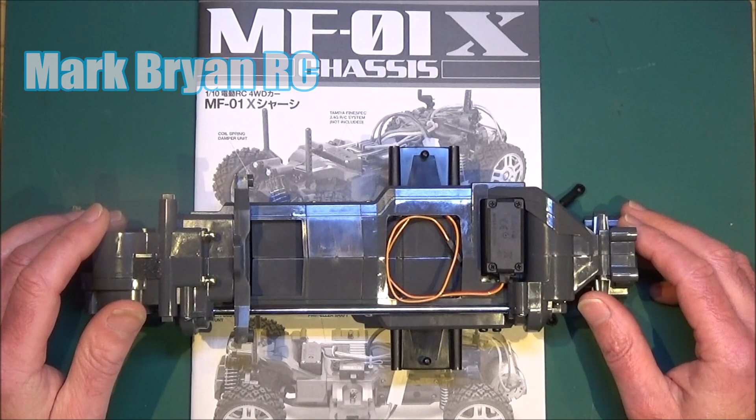Hi there, Mark here again, welcome to this video, part 2 of my build guide for the MF-01X chassis. It will eventually be a Ford Escort Mk2, but so far we've got this far with the chassis. Most of it is together - we've got the prop shaft down the side, the servo installed, and the steering linkages. Let's get on with step 19, and hopefully by the end of this video we'll get this chassis up on its wheels.

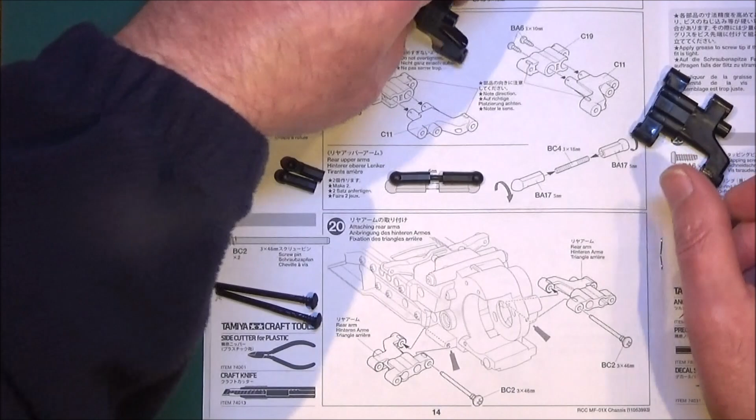Parts 19 and 20 are making up the rear arms and attaching them to the chassis, and it's time to open up parts bag C to do these steps. I've already made up one arm - it's really simple. Get parts C19 and C11 and make sure you get them the right way around like this, then simply pop them together with a 10mm screw in each of these two holes. As the instructions say, don't go crazy over tightening these, because this is very soft plastic and it'll be easy to strip the plastic out of those holes.

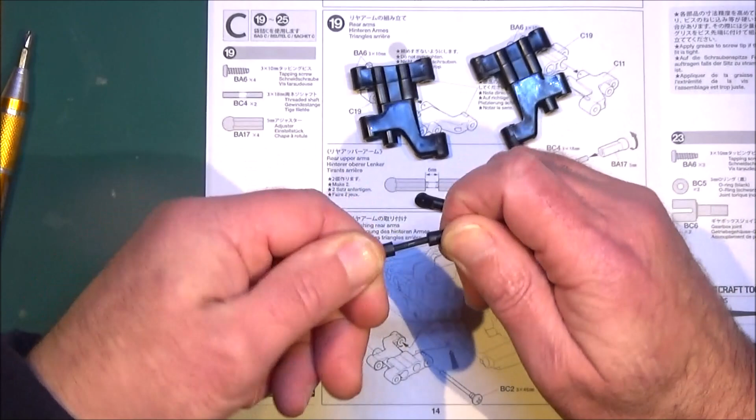With those done, you just need to make up two of these, which are the rear upper arms. You need this little threaded bar, and you need to thread on a BA17 ball adjuster, and screw that in all the way. Well, I say all the way - it is quite tight, and you need to just follow the diagram there and make sure that the gap is 6mm between those two ball ends.

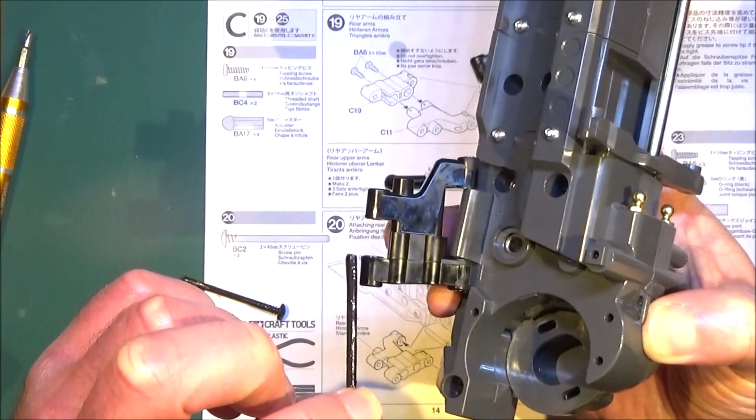Step 20 is simply a case of attaching those. Make sure you get the alignment right, so the arms need to look like this, and make sure you're attaching to the end where the motor's going to mount - that's going to go on there, and simply fix into place with BC2, which is a 3x46 screw pin. Notice I've put a little bit of grease onto this screw pin because these do tend to rust. Simply fix one on each side.

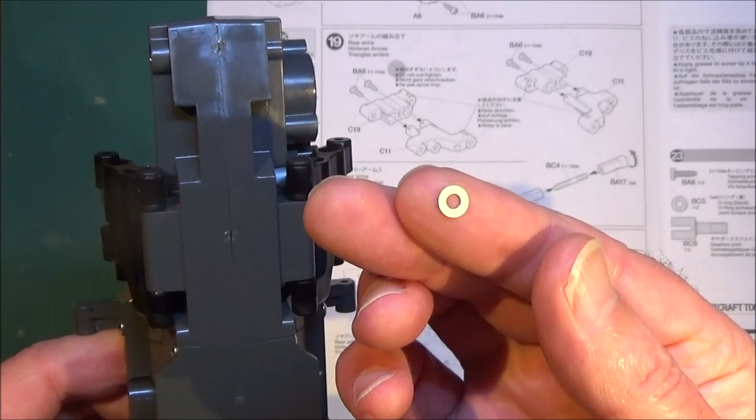Just a little tip here - as you can see, this is fitted with just the screw pin, and if you look closely you can see that movement there. It moves up and down quite a lot, and I'm not too happy about that. So all I've done is got a 3mm washer like this, and fitted it in between the chassis and the end of the wishbone, or the A-arm. Now I don't know if you can see that, but I'm trying to move it and there's hardly any movement at all. So yeah, a simple washer solves that problem.

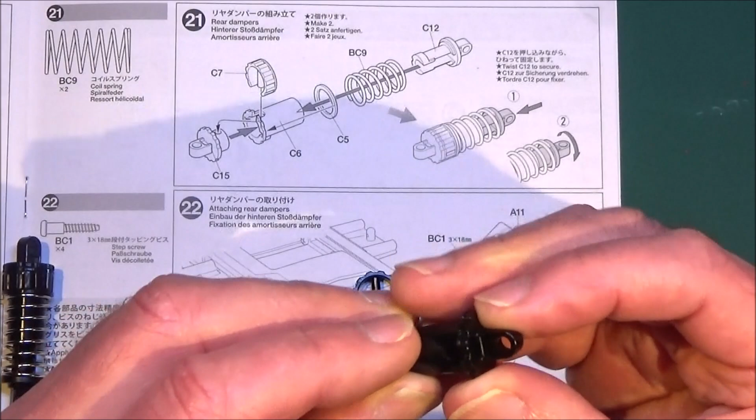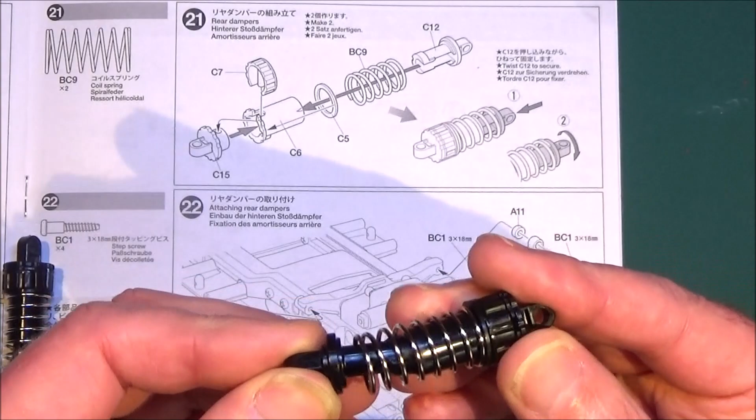Step 21 is making up the rear dampers, or pogo sticks as I call them, because there is no damping in these whatsoever. But anyway, if you're going to use these, it's really simple. Basically get your body, slip the cap in, then you've got this kind of spring clip thing, goes like that. Then you've got your C5 spacer, put your spring on, then simply get your other end here and push it inside and give it a half turn, and that's your really amazing quality shock absorber stroke damper.

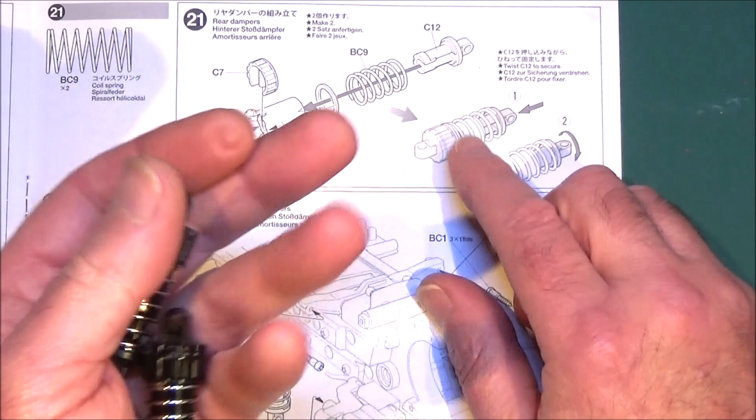They're all the same, so you might as well make up the four while you're at it if you're going to use them. But I won't be using those because I've got these budget alloy oil-filled shocks from JKRC. You can see the number there - about 12 quid, so cheap as chips for a set of 4.

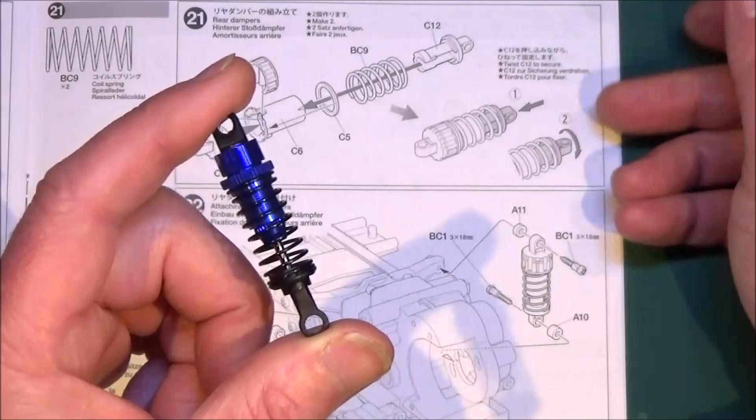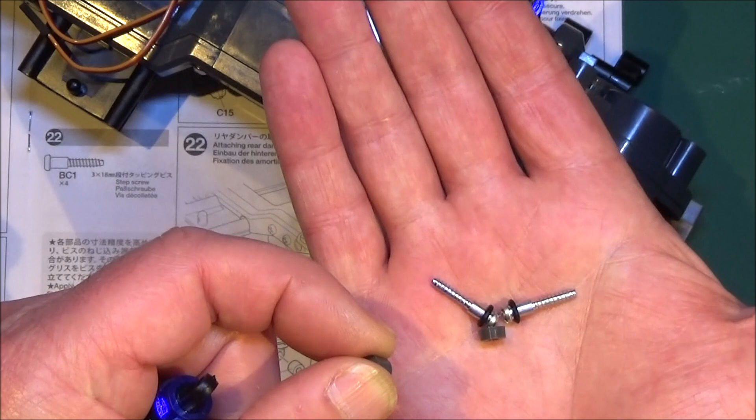So I'm going to be putting those on in the next step, which is 22. To fit each shock, all you need is BC1, which is the 18mm step screw, and you need these plastic parts A10 and A11. You can see them there, and the A11 goes at the top and the wider A10 goes at the bottom. These shocks do come with O-rings just to space out the top and bottom mount, because they are rather narrow on these. So that's why you're seeing those.

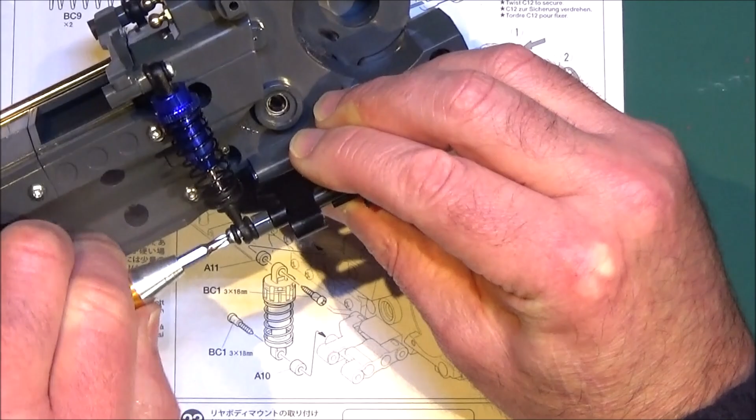Okay, so they're both fitted now, and yeah, they seem to work quite nicely. Nice bit of damping there.

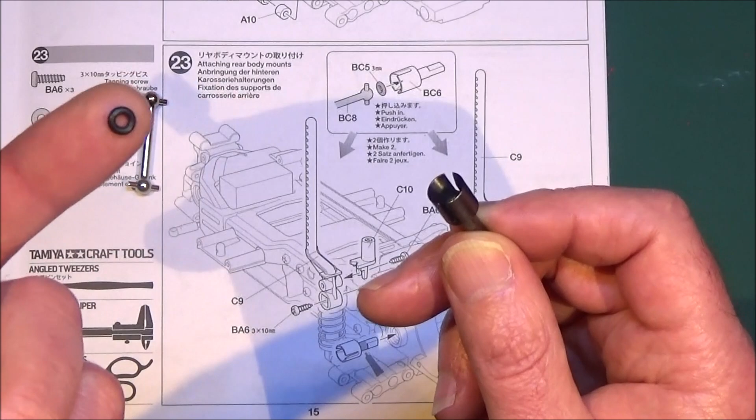On step 23, you want to get your gearbox joints, or I call them the output cups, and you want your little BC5 O-ring, which you just pop in the end. Like it shows, get a drive shaft or dog bone, give that a good push in, and put a bit of grease on these, and simply slot them into the rear diff there.

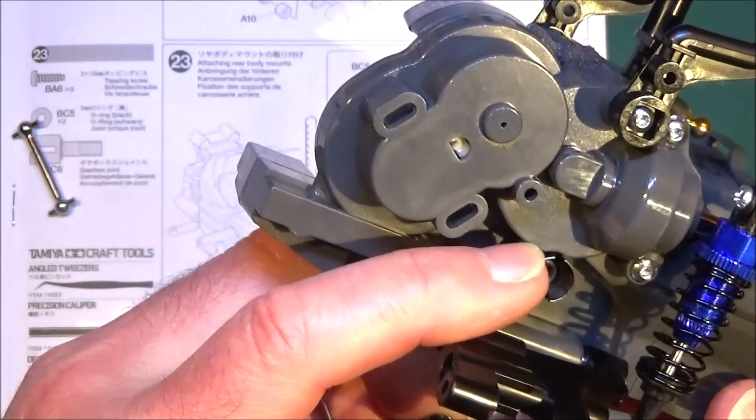You might have to turn it round a couple of times to get it located, push it right in to get both of those in. As shown here, you've got part C9, these long body posts, just one screw as you can see where they're attached, one on each side, and the aerial holder if you need that, which is part C10.

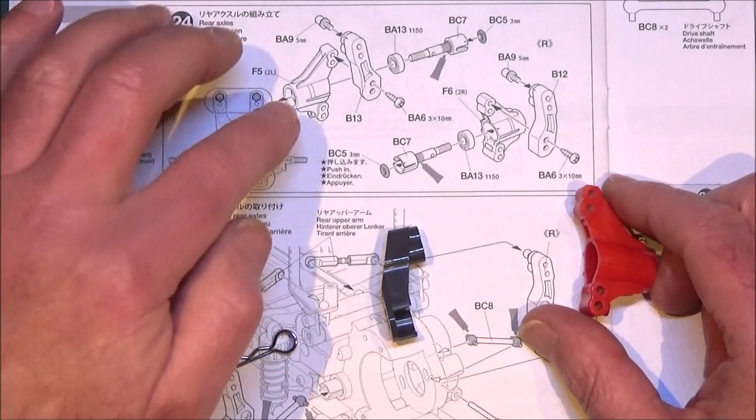Step 24 is making up the rear axles, basically the carriers for those. Make sure you get them right way around, as they are left and right. You've got part F5, which is the one I've made up already, and then part B13 that attaches to the top. So we'll just show you making up the other one.

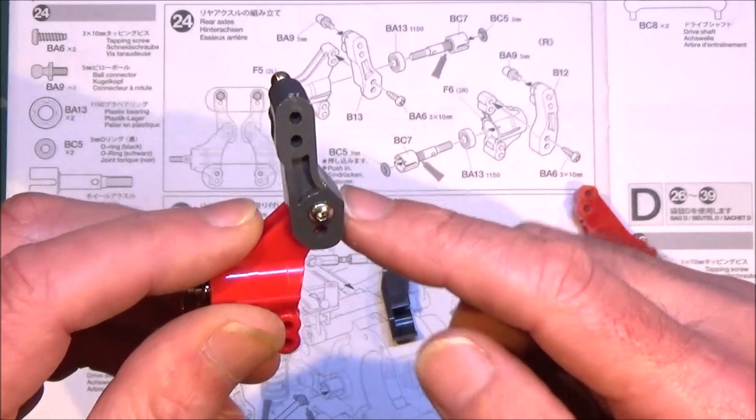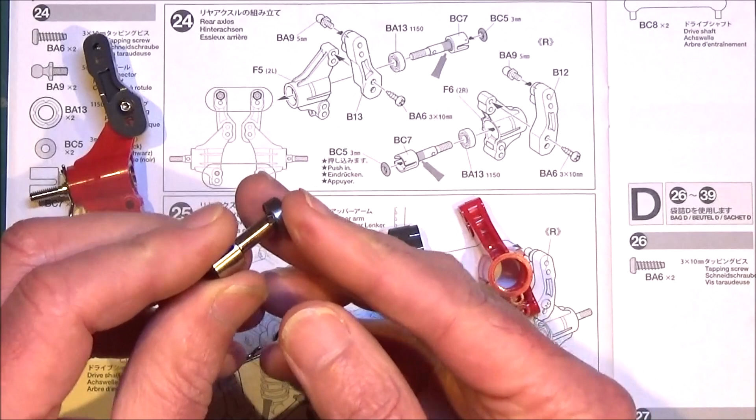First thing I'm going to do is get the bearings into this part here, F6. Get your axle and pop in the O-ring, then get your bearing or bushing, pop that over and through, and pull that into place. It only shows putting in one bearing, but I'm going to put the other one in now, and just hold that with an R-pin so it doesn't fall out.

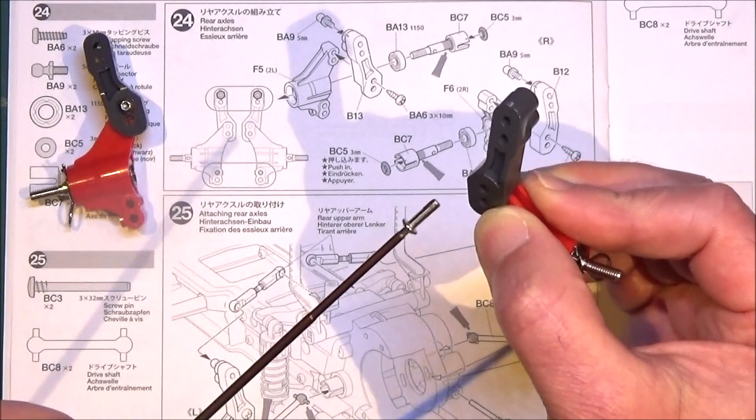Simply get part B12 and that just clips over the top there, and you fix it with one screw in the top hole. Now if you've seen the other part of my build guide, you'll see that I'm replacing most of these 10mm screws with stainless steel screws, with the advantage they're also hex drive, so there's much better purchase on the head of the screw.

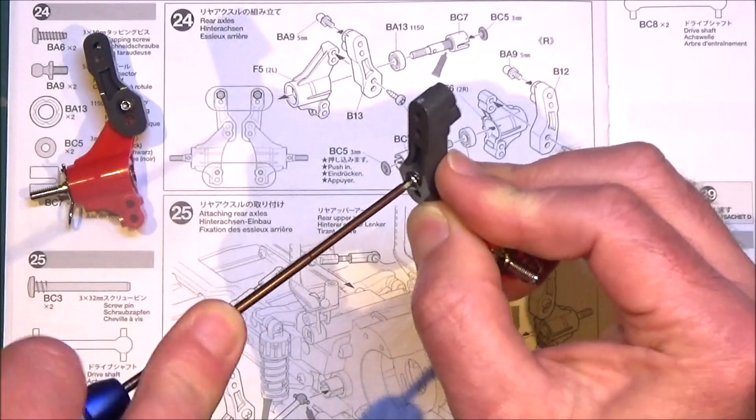When you've done, you should have the two left and right like so. Oh, and I forgot to mention there's a high and a low setting for step 24 and 25. Obviously this is going to be a rally car, so I've done the high setting. Don't forget to put that brass ball joint in the top, your 5mm ball, in the top of the two holes on each of those, and onto fitting them on now in step 25.

As you can see, I've done this side already. One thing I've done is swapped the screw pin for this stainless steel shaft. It was a spare that I got in the box, I got a few of these. I haven't got the longer ones for the other end of the A-arms, but I have got these, so I'm going to use them. Simply a case of locating the bottom hole and pushing the pin through, or your screw pin.

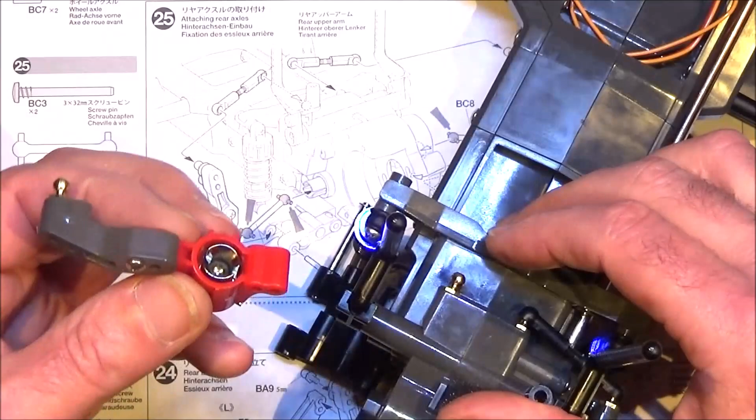I'll just get the circlip on this if I can, and with that attached, get your dog bone, pop it in place. Then you need the top arm we prepared earlier, just pop that on. And that's both sides fixed.

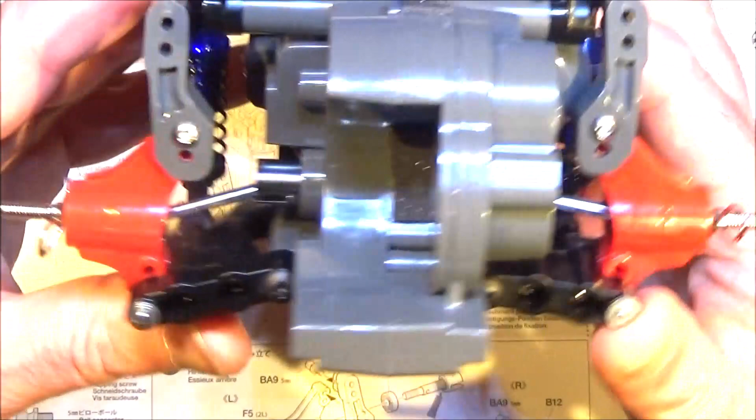And here we go, I've made a rookie mistake. You might have noticed, the eagle-eyed of you, that I've used the bottom hole and it should have been the top hole for the higher position, so I'm going to have to take the pins out the bottom and put them in that hole at the top on each side, and it'll be right then.

Okay, so there it is with the correct holes used, in the top of the two holes as it shows in the diagram. I've just double checked and treble checked this, and I've set it now as it shows in the manual, and I've encountered another problem. I'll just get my ruler and you might see.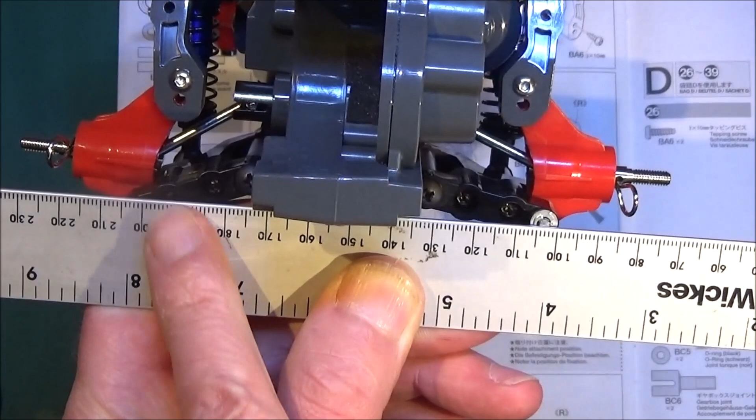If I put this flat along the chassis, you can see the pin on this side, but you can't see the one on that side because it's a lot higher than the other, and that's because this top arm is hitting on this lump in the chassis here where the prop shaft drive is. See, there's not one on this side, so that's allowed to move freely up and down, as you can see.

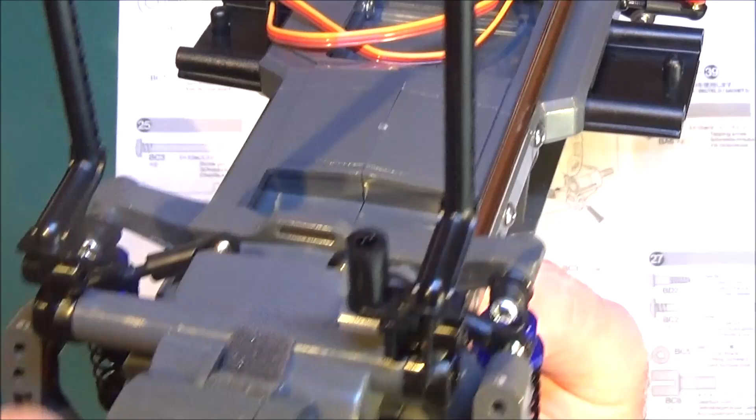But this one, that arm is hitting, so I'm just going to try and do something, cut down this ball joint a little bit here, just cut a bit of the length off. I hope that clears, and also if I space out the back of that ball joint, the brass ball joint, just a little bit, we might get that bit of clearance, so I'll just go away and have a play with it.

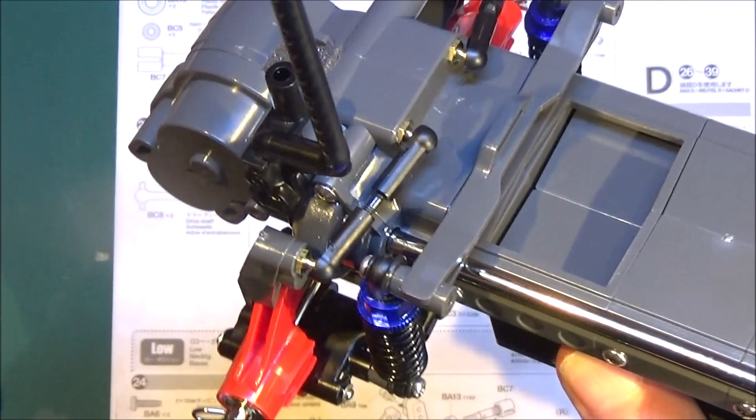Okay, so you can see I've cut this ball adapter down a little bit, so it's about 2 or 3mm shorter, and it seems to clear that bit of the housing now. I've also put a little spacer on that ball joint, and that seems to have solved the problem. We've got kind of equal drop now, so there's something to look out for. But anyway, on to the next step.

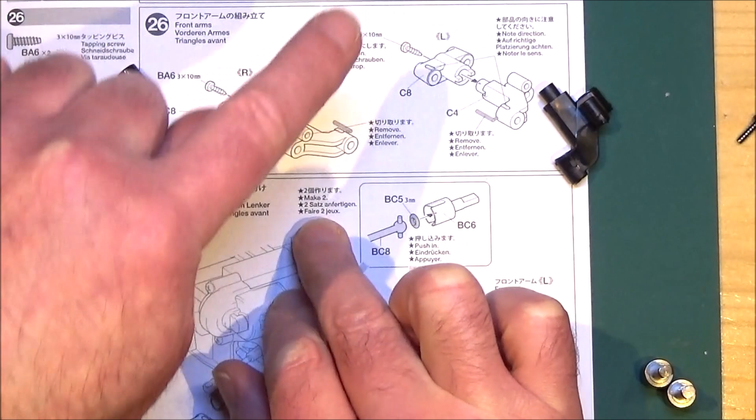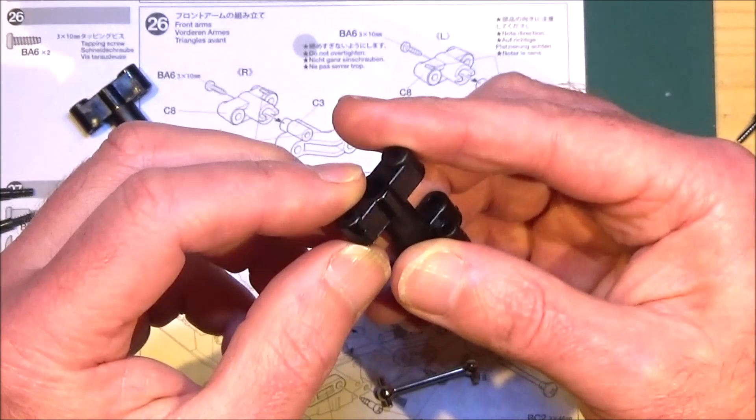Step 26 is very simple, it's just making up the front arms. This is the right hand side. Be careful because they are sided, so you need C3 for the right and C4 for the left. C8's the same at the back, so you've got C8 and C4 for this side. As you can see, this slots together, it is keyed, and you need that little notch to the left hand side there, and it's just a 10mm screw in that hole.

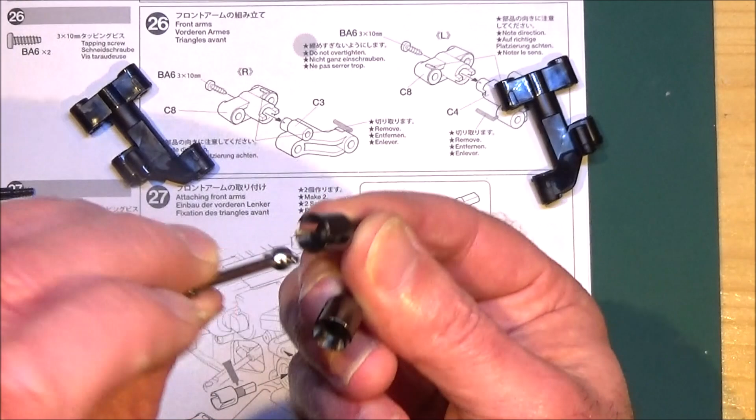In step 27 we're going to attach them now, and also fit in the two gearbox joints. Don't forget to put in that rubber O-ring and give it a good push down, one in each of course. A bit of grease on here, and then insert them into the front diff.

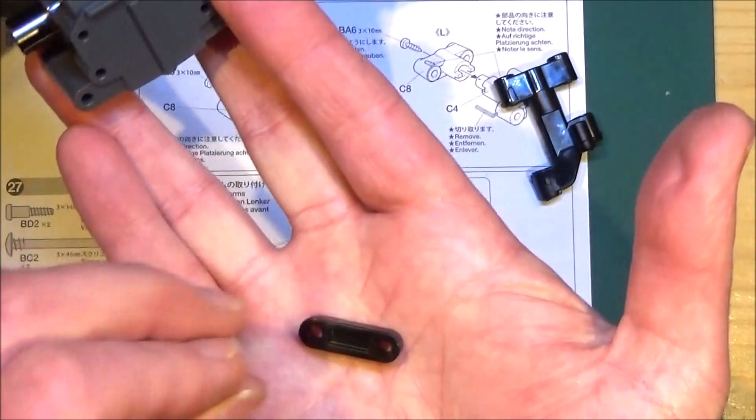Then we need to fit on these parts, C8, with the step screw into the front, like so. Then you need the 40mm long screw pin, and we're going to attach those lower arms.

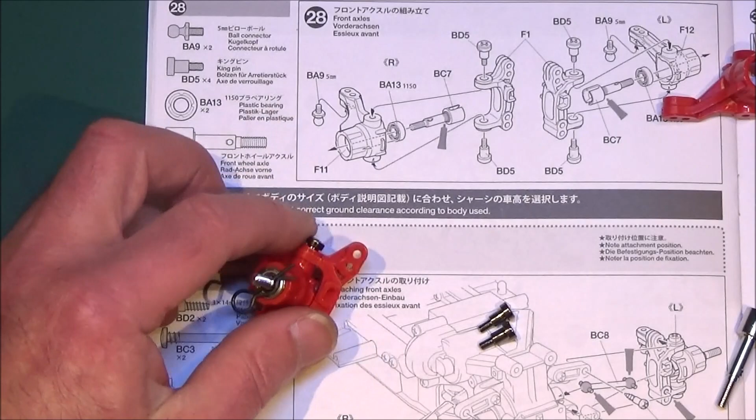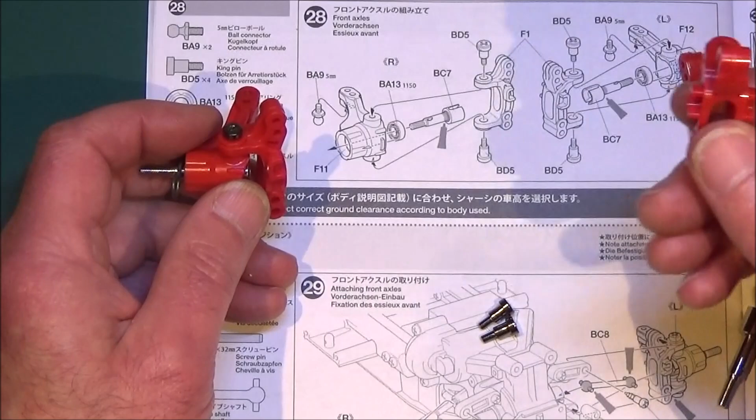Okay, on to the next step, which is step 28, making up the front axles. As you can see, I've already gone ahead and made the first one, got a bit of practice in, but they're both the same. Make sure you get the left and the right way around, because you've got part F11 and part F12 — they are different, but the C-hubs are the same, those F1s. So make sure you get the right one for the right side. We'll just show you making up this one.

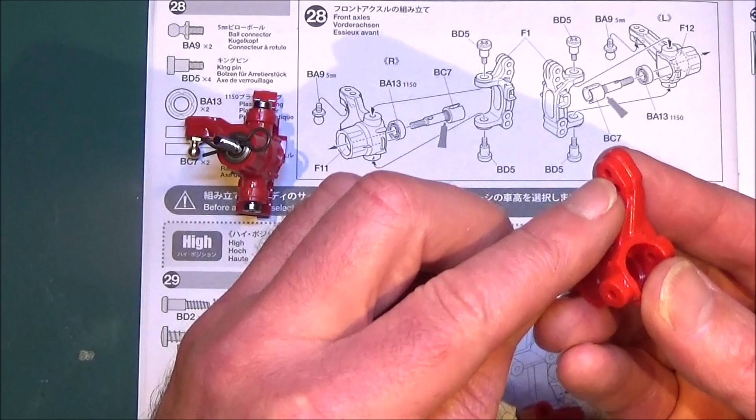The first thing you need to do is get your F12, get it this way up, and then your brass ball joint needs to go in the outer hole from underneath, like so. It shows putting one bearing in, but I'm going to fit both bearings and then hold it all together with an R-clip.

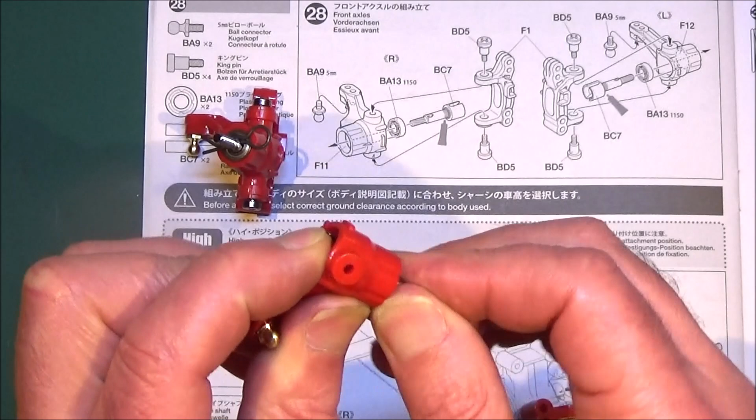So it's best to put the bearing over the axle first. Note that there are no O-rings going into these, like there was in the last step for the rears, but that's the way it shows, so that's the way I'm doing it. Put the other one in, and then I'm just going to hold it with an R-clip, and then we've got to hold it together with these kingpins.

Now I do recommend, after doing that one, that you put some grease on these threads. It's quite hard cutting round thread into this really hard plastic, so I'm definitely going to do that this time. It's surprising just what a difference a little bit of grease makes.

So make sure we get the alignment correct. Just start that one off and then fit the other one just to get it all lined up, because you don't want to screw these kingpins in at a wonky angle — we're going to be in trouble if we do that. So just get each end started, and get them both done up, and that'll be the end of step 28.

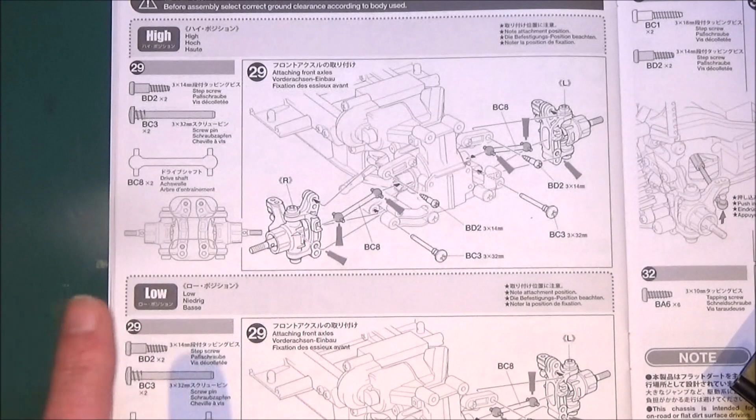On to step 29, which is attaching the front axles. As you can see, there's a high setting and a low setting, and we're using the high setting. Basically, you need to connect up your front arm using that top hole and that top hole there to get that higher position.

I've already done the one side and it looks like this, so I'll just show you quickly how to do the other one. It's very simple. Make sure you get left and right the right way around with the ball end pointing downwards. Basically just place that in the lower arm.

You can use the kit standard screw pin, which you just push through and screw in, or like you've seen I've done on the other side, I've got these stainless steel pins, so I'm going to put that in instead. Get your dog bone and locate that into each of the cups.

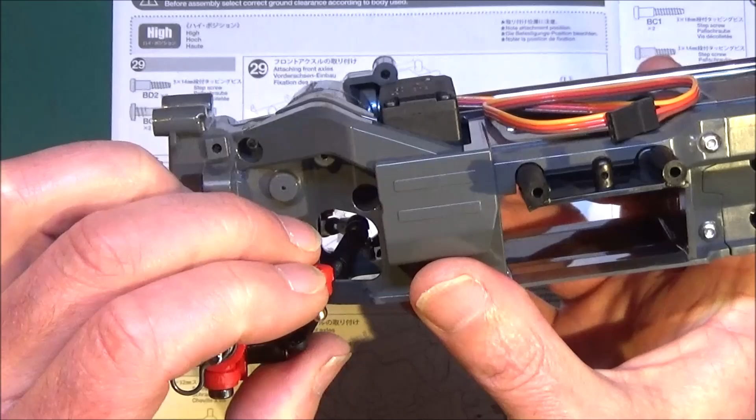Simply get the top arm, your step screw, and fix that into the top of the two holes. Simply clip on your steering arm, your tie rod, and that's the end of step 29.

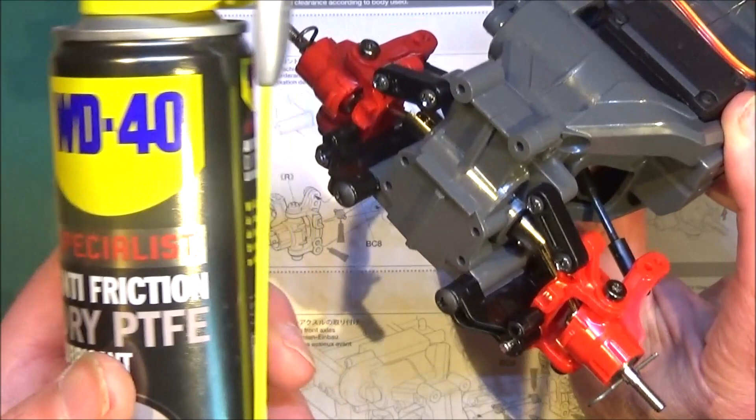You should have suspension working up like this. We just need to get the shocks on next. By the way, it does show putting grease onto the ends of the dog bones, but I haven't done that because I'll be giving a good spray with this PTFE dry lubricant, and that won't attract the dust and the dirt.

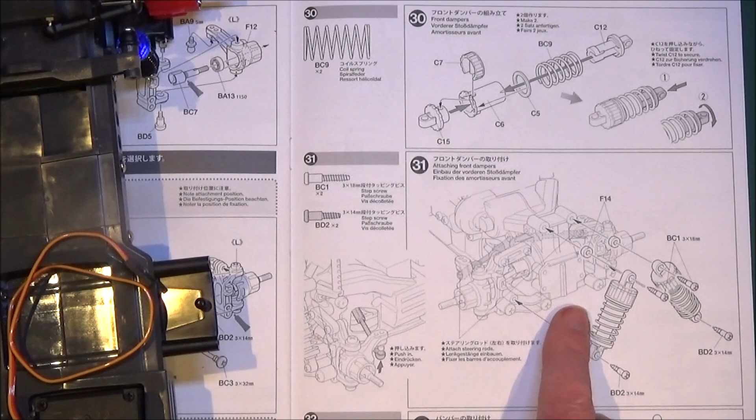Step 30 is putting the front dampers together, which we already did earlier. But as you know, I'm using the alloy shocks, so not going to be using those. Step 31, we're going to be fitting those. That's such a simple step — I've already gone ahead and done that.

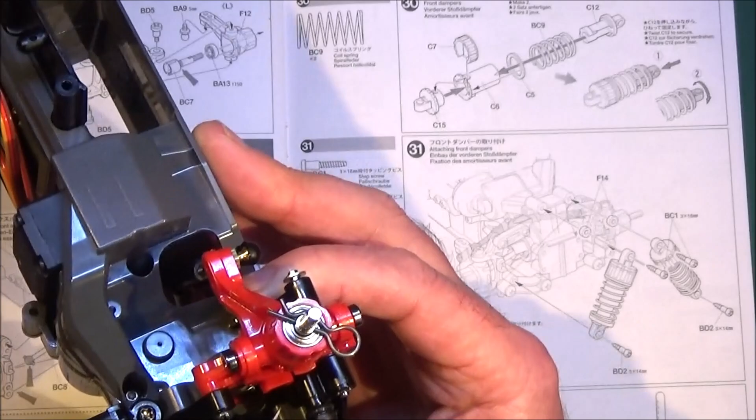As you can see, that's the front suspension all finished and working. That's simply a case of attaching the top ones with these silver step screws, the longer ones, and these red F14 spacers. They go into those two holes at the top there, and the bottom is simply the shorter, darker step screw straight into that mount point there. Obviously same for both sides.

And I've also whizzed on to step 32, which is attaching the front body post, which is C1, with the simple 10mm screw in there and in there. To finish this step, it's just part C2, which is the front bumper, and it locates onto the 4 holes in the front here and sits on there, with 4 10mm screws.

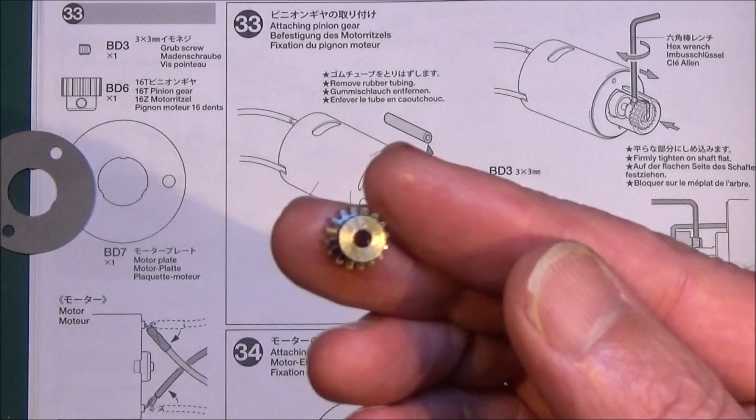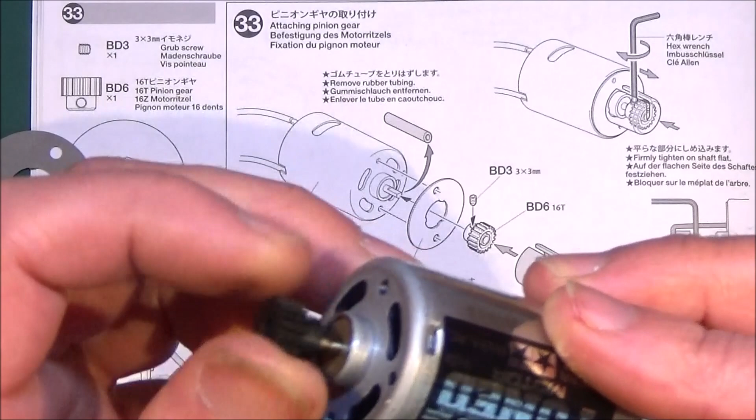Step 33 is attaching your pinion gear. This is the standard aluminium 16 tooth pinion you get. You need your grub screw, which we can see on the end of my Allen key, and get that started in the hole. But as you can see, I've got a darker one on mine, a steel pinion which will last a lot longer. It's 17 tooth, so it will raise the gearing slightly but not too much. I'm going for that for longevity.

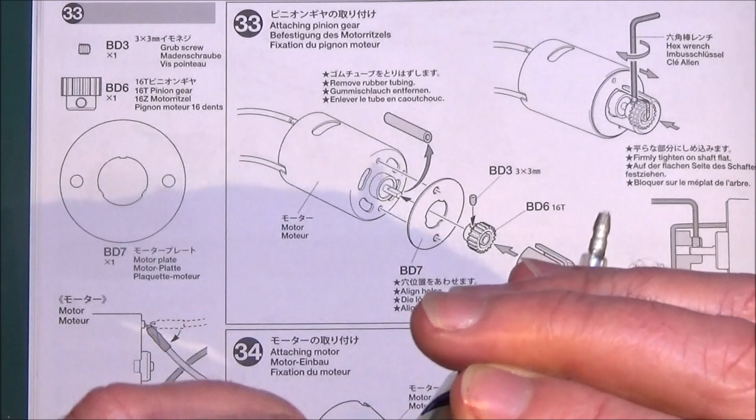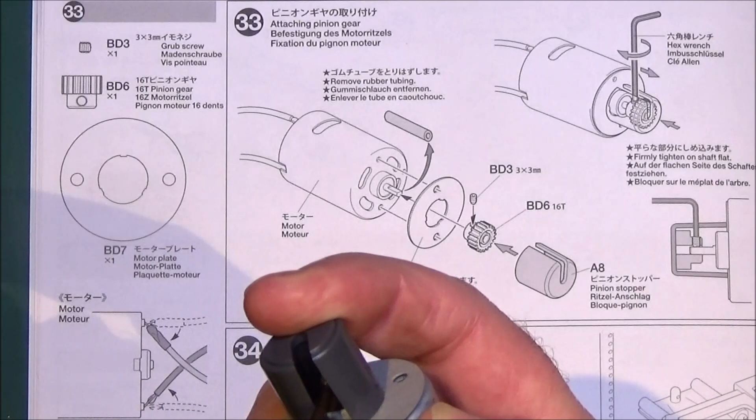Get your motor plate, clip that over and line up with the screw holes like so. Then get part A8, the pinion stopper, place that over, and make sure the pinion is pushed up against the end of the stopper, then do up the grub screw.

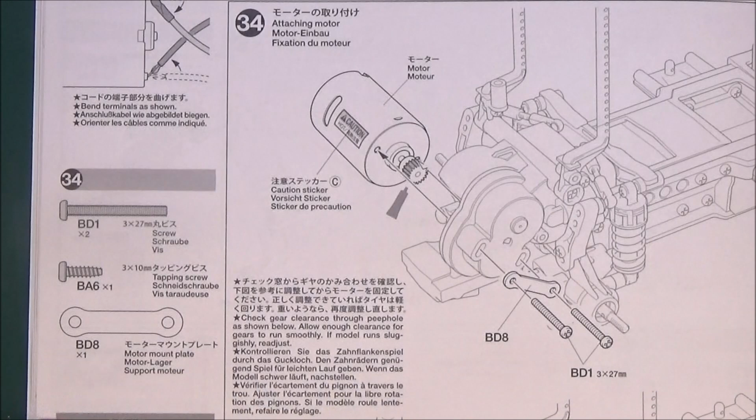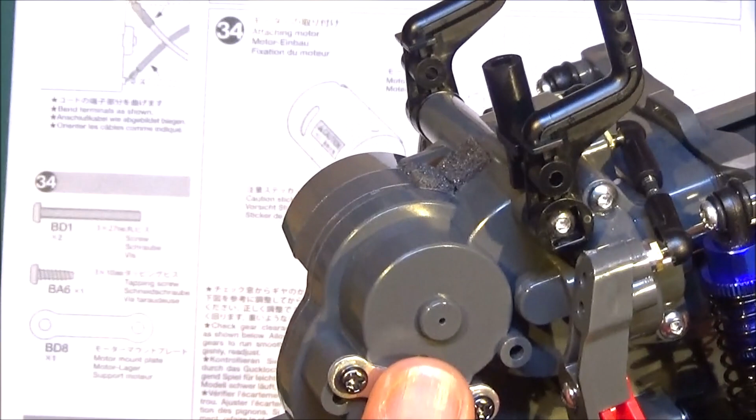In step 34 we're attaching the motor, so you need these two 3x27 screws and this metal part BD8, a metal bracket. Push those through ready and get the motor lined up into the gearbox. You'll see there are slots instead of round holes, which is unusual on a lower level or entry level Tamiya. They slide up and down in those holes, meaning you can set the mesh, and you can use that hole to see what the mesh is like between the pinion and the spur gear.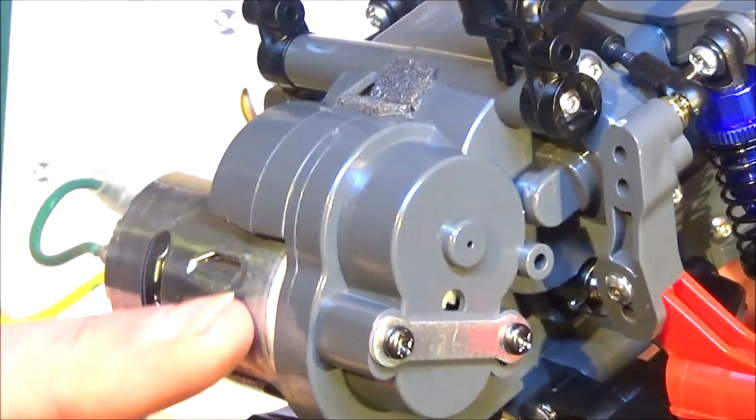Now we'll try and get this mesh set up. This is actually quite a tricky job because the screws are so long, allowing the motor to move without these screws moving at this end. So it's really tricky to get this mesh quite right. Make sure you don't ram it in really hard because you'll just wear the teeth away, but you don't want it too far away either, else it will chew the ends of the teeth off. It's a bit of a fine balance.

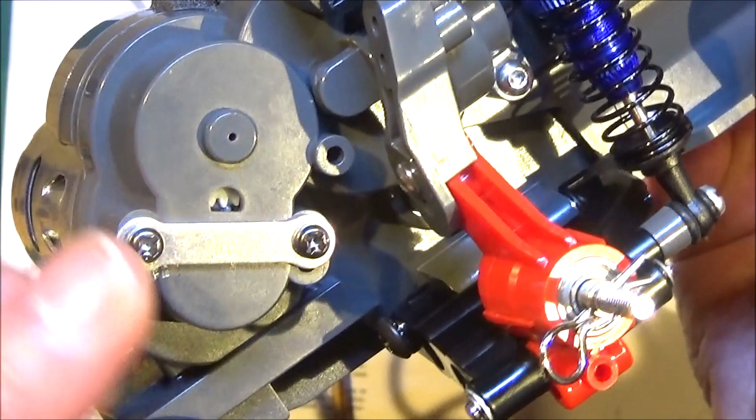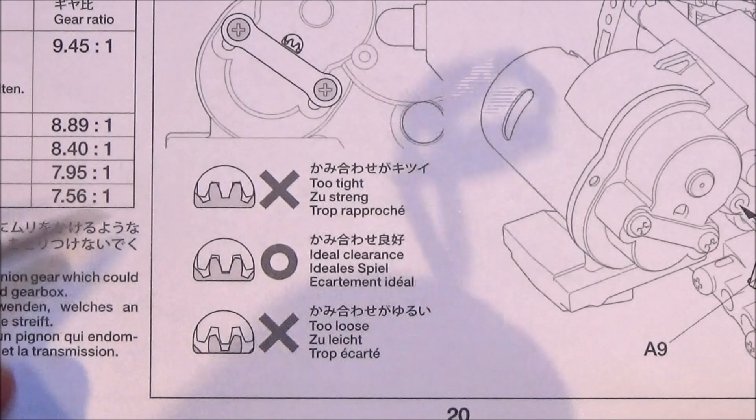Unfortunately I don't think you'll be able to see, but I think that's about right - you might just be able to see the teeth in there. It shows you here in the manual: if the teeth are really pushed right in, that's too tight. It says this is ideal, with a very slight gap, and if it's just catching on the end, it's too loose. I'll try and zoom in with the camera again - there is just a little bit of movement. I think that's about right, so we'll give that a go.

To finish this step, you just need part A9 and a 10mm screw, which covers over that inspection hole and stops dust and dirt from getting in. So just get that screw in, and it's on to fitting all the electronics, which I've just started.

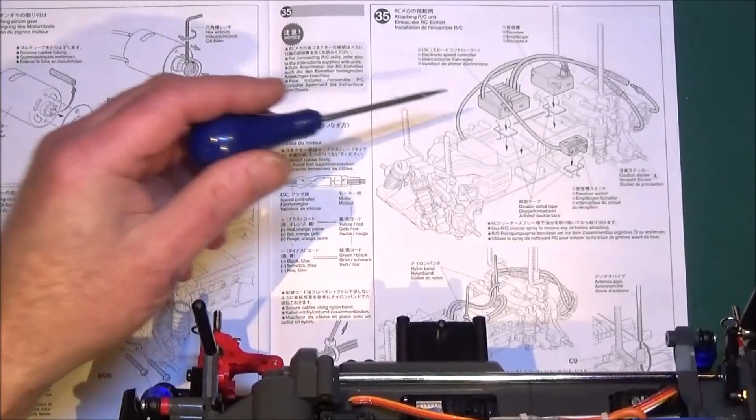As shown in the diagram, I've fitted my ESC into this recess here. There's a dip in the chassis, and there's also one at the back where I've fitted the receiver. They fit in quite nicely, and I've fitted my switch on there with a bit of double-sided tape, and connected it all up.

So the chassis is almost complete. The last thing we need to do is put the tyres onto the wheels, which I have done. As you can see, I've put some glue on as well. The important thing to note is that they are sided - you can see the tread patterns, so make sure you put the tyres with the lettering on the outside. There's a circle on the two which are for the left hand side, so those two are the left, and the treads are opposite for the right.

So all we've got to do is get these mounted now. I take my clip out that's been holding it together, put in your little bar, get your hex adapters, and simply get that lined up and get one of your lock nuts on. I'll just get the other three on now.

There we go, chassis finished, and it's all seemed to have gone together quite well. It's very sturdy, very solid construction. The suspension seems to be about right, I think, with a bit of damp in there, and all we need now is to get that bodywork done.

This is the Escort shell, very roughly cut out at the moment. I've yet to properly have a go at that, so just sit it on, and there it is. This is going to be a great project, and I hope you follow along with the bodywork video.